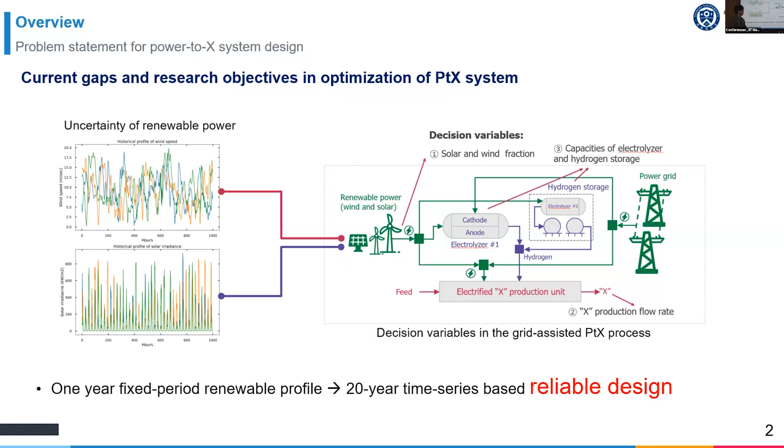So for suggesting some reliable decision point or design point, considering the time series uncertainty of the renewable profiles is important to prevent the oversized problems and secure the economic feasibilities.

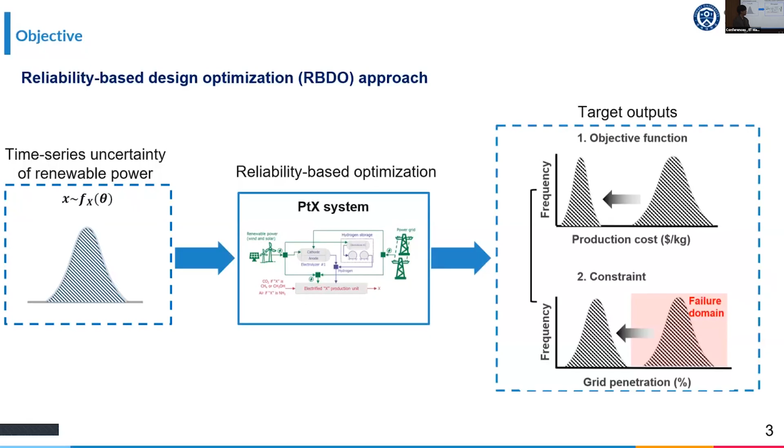So in these studies, we adopt the reliability-based design optimization approach, which is called RBDO. The optimization goal of these studies is to figure out the optimal design variables, which can reduce the impacts of the renewable uncertainty on our objective function, which is the production cost, while regulating the constraints of the renewable performance of the PTX systems, which should be defined in the probability density domain.

So for implementation of the RBDO of the PTX designs, two sections are considered as the workflows. In the first, regarding the construction of the PTX evaluation models, the model calculates the distribution of the production cost and the grid penetrations under the impacts of the renewable profile uncertainty.

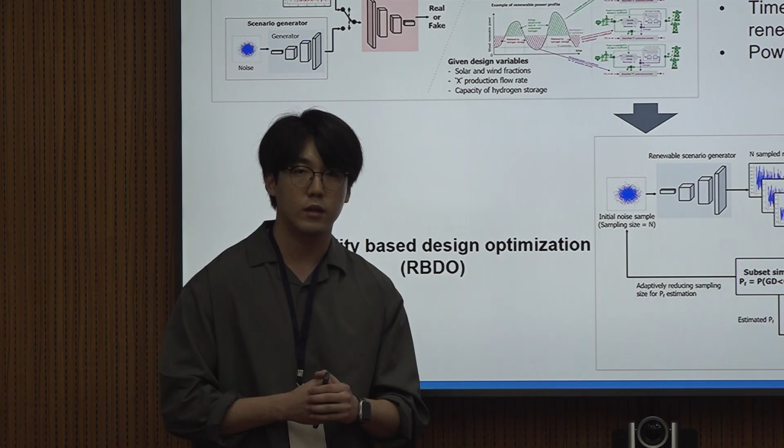To complete the first work, firstly, the uncertainty modeling of the renewable profiles was conducted based on a data-driven approach. And second, under the given renewable profiles and the design variables, a power allocation model was formulated to calculate our target outputs. And in the second section, in RBDO, the constructed PTX evaluation models were properly integrated with additional stochastic simulators and conventional derivative-free optimizers to figure out some reliable design points.

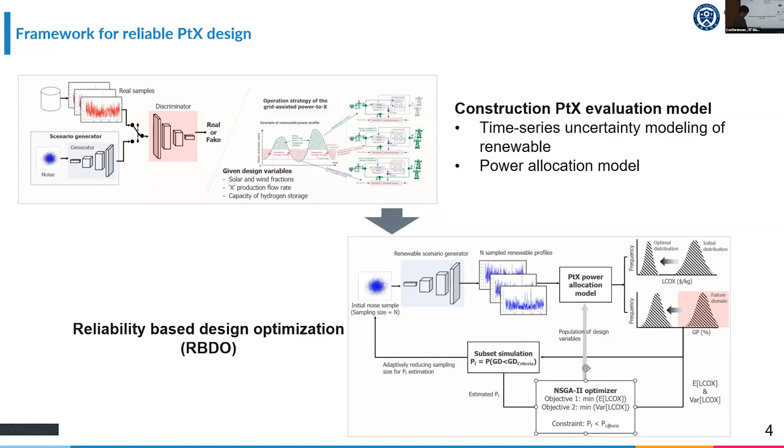So in the first section, for constructing the PTX evaluation models, we adopt the generative adversarial network approach, which is called GAN, to model the uncertainty of the renewable profiles. So during the training, the noise sample from the Gaussian is transferred to the generative network, and the network produces fake annual profiles of the wind and solar. At the same time, in the discriminator network, the real wind and solar profiles are drawn from the database and transferred to the discriminator with the fake generated data.

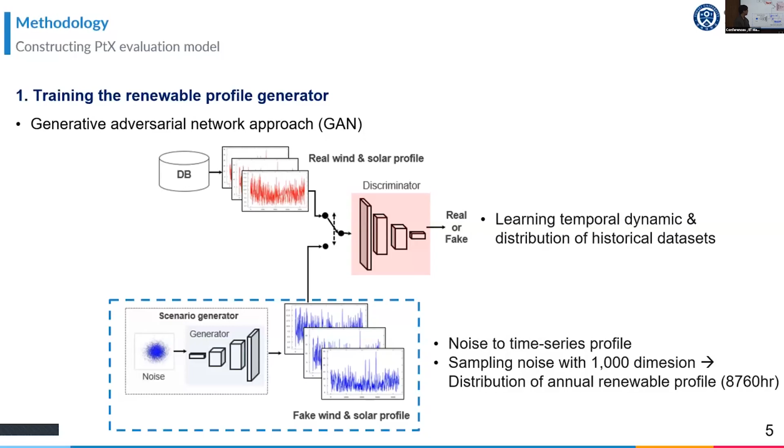So using these two data in the discriminator, the network tries to measure the difference of the distribution between the real and the fake. So after the training, the generator can theoretically capture the temporal dynamics and some complex patterns of the historical data. And using the trained generator, we can generate the distribution of the renewable profiles from simple Gaussian noise vectors.

For training the GAN, Jeju Island in Korea was chosen as the geographical site, and we downloaded data from 2001 to 2019, and the data types are the wind and the solar irradiation. And all of the data was automatically downloaded from the NASA Renewable Power Data Bank API. The detailed network structure and the loss functions are as follows.

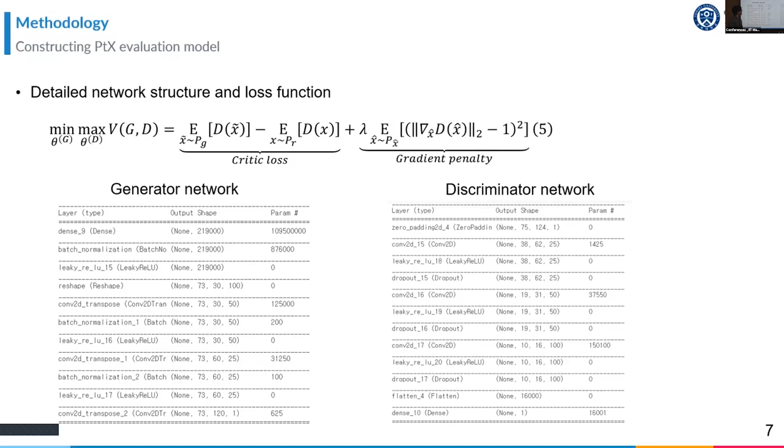In the training, to capture the temporal dynamics of the historical data, deconvolutional layers and convolutional layers are included in the generator and the discriminator network respectively. For the training, we adopt the Adam optimizer and a training batch of the real historical data is transferred to the discriminator network in every iteration, and a total of 1,000 epochs is conducted.

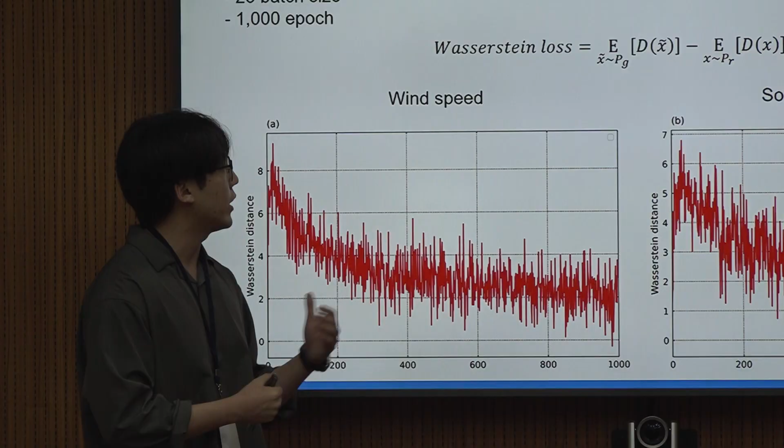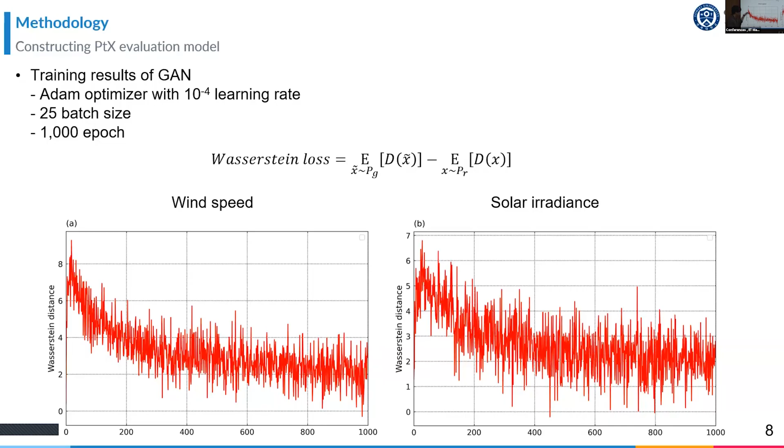As I mentioned, in terms of the generator, it is important to generate fake data which has a very close distribution to the real one. And in the GAN, to measure this performance, we can use the Wasserstein loss, which is calculated by these equations. And this equation means how close the fake data is to the real ones. And as you can see in the training graph, both in the wind and solar case, as the epochs go on, this distance between the fake and the real decreases and goes to near zero.

And the second step for constructing the PTX evaluation model is formulating the power allocation models. Under the given profiles and design variables, the model determines the time series profile of the renewable and grid allocations to the subsystems in the PTX systems. The power allocation can be classified into three major cases.

In the first case, the generated renewable power is transferred to the electrolyzers, and the electrolyzers produce the hydrogen, and also a portion of the renewable power is transferred to the X production systems. For example, we capture CO2 and produce methanol or some high-value chemical. In these cases, surplus renewable power is transferred to the storage tank and converted into compressed hydrogen gas.

And the second case is that if the renewable power is insufficient for operating the electrolyzers, additional power is supplied from the power grid, and additional hydrogen is fed from the storage tank for the constant X production. And the last case is when the renewable profile is insufficient for operating the X production system.

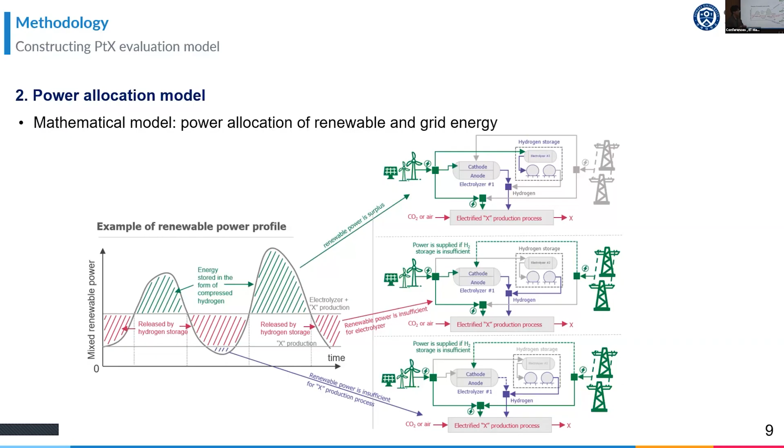So due to these well-defined cases of the power allocation, even though I said these are mathematical models, the power allocation models can be constructed by using simple energy balance, mass balance, and energy conversion efficiency, which is derived from Aspen Plus. And these are examples of how we defined and constructed the power allocation models in the Python environment.

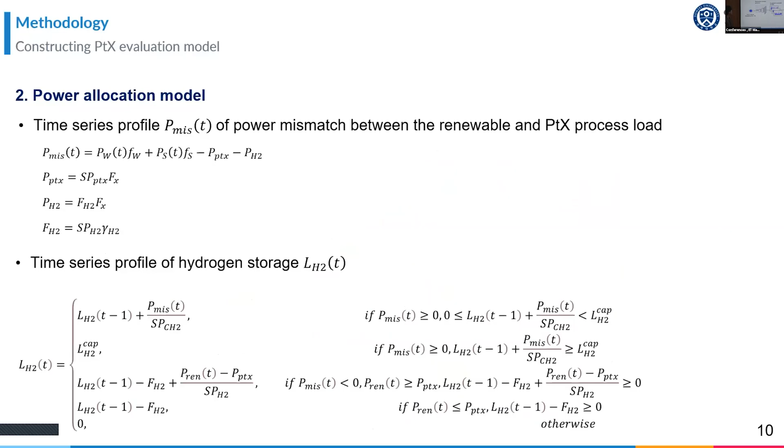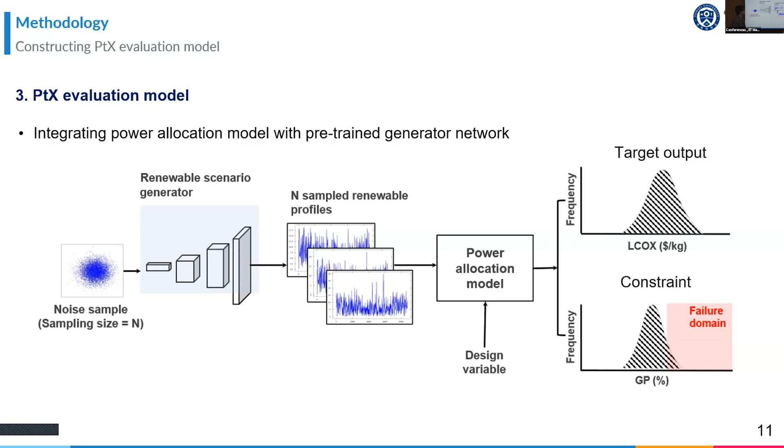According to these procedures, we can calculate the distribution of the production cost and the grid penetration under the given design variables with just simple noise points. As mentioned before, using the PTX evaluation models, we additionally conducted reliability-based design optimization to figure out some reliable design points.

But in the RBDO approach, due to the probabilistic behavior of the system, two different points are encountered compared with conventional optimization problems. The first one is the constraint. In the RBDO approach, for calculating the constraint, firstly we have to define the limits of the constraint. In this case, we assume the grid penetration as a constraint, so we set the upper limit here. And as I repeated, due to the uncertainty impacts, the grid penetration of the PTX also follows a probabilistic distribution.

So grid penetration points beyond our upper limit can be defined as failure points of the system. This is just a semantic definition of failure, and it does not mean that the process really fails. So just remember it. According to these definitions, if we know exact information about the distribution of the grid penetration, we can calculate the probability of failure of the system.

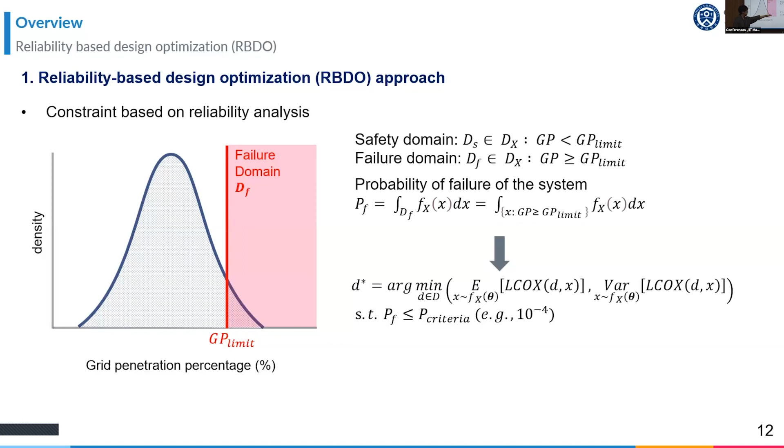But calculating the constraint, which is the probability of failure, needs additional stochastic simulation techniques. Of course, if our model is simple, linear, and low computational cost, we can just use simple Monte Carlo simulation to calculate this failure probability. But our PTX evaluation model has a high dimension of uncertainty, and the PTX model itself has high nonlinearity. So the Monte Carlo simulation approach is not a feasible option. So in this study, we adopt the subset simulation stochastic method.

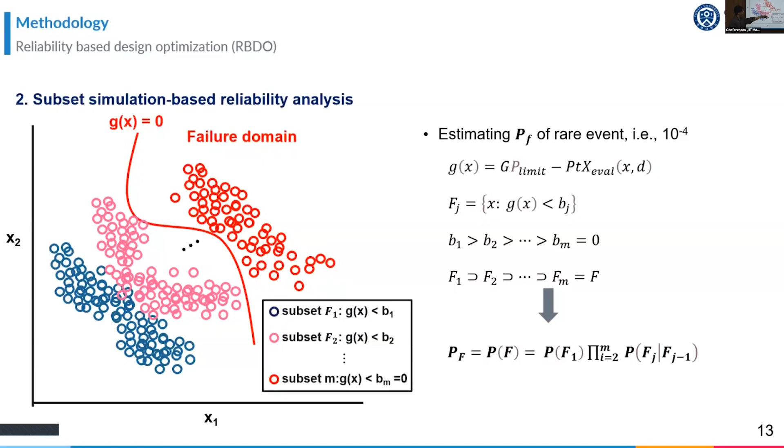The basic idea of subset simulation is to define our target failure as the product of a sequence of conditional probabilities, which can be derived from the subset points. So here, let's say that our target failure domain is here, where the threshold is zero. From the initial subset, using random sampling, we can generate the next subset which satisfies these conditions. And according to the subset simulation algorithm, we can continuously decrease the threshold and calculate the failure probability with high accuracy.

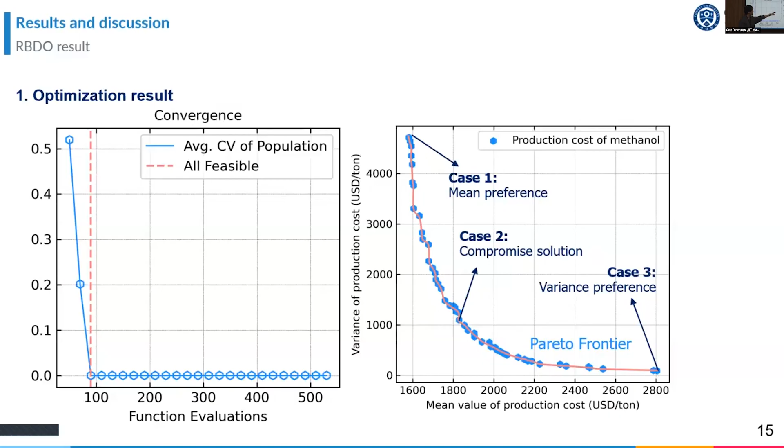So according to these two techniques, we formulate the framework. As you can see in the graph, all the optimal points satisfy our constraint. And because we adopted two objective functions, the production cost has a trade-off relationship between the average value and the variation. And this is the uncertainty propagation result for these three representative points. As you can see in the graph, the variations generally continuously decrease.

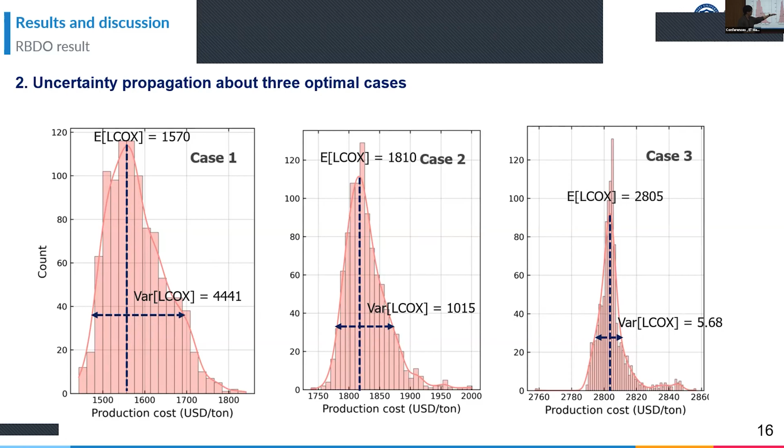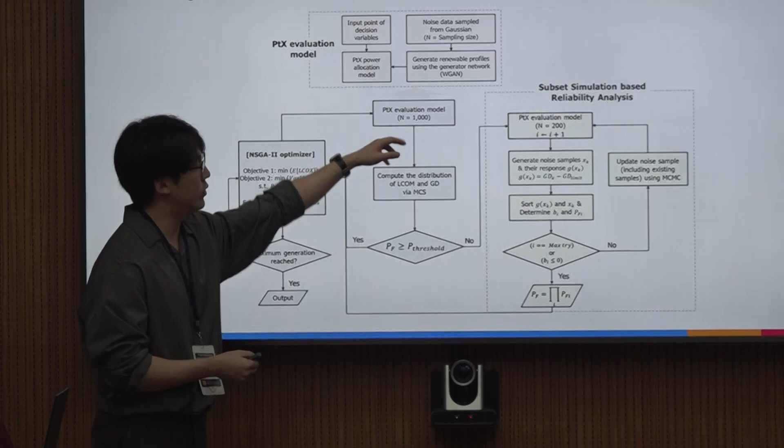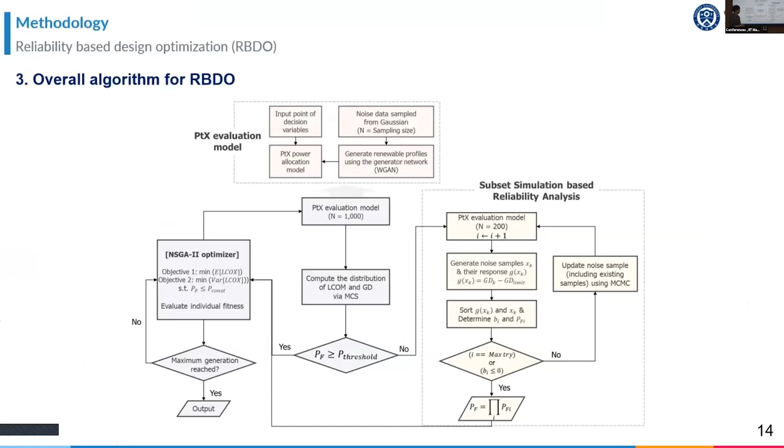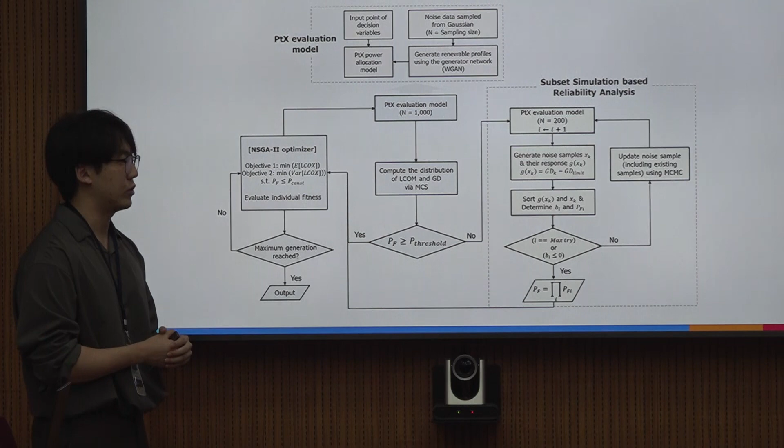Okay, maybe I'll ask a quick question. How many samples do you actually use for this? First, to calculate our objective functions, 1,000 samples are generated from the noise. And as I said before, to calculate the failure probability, more samples are required to meet high accuracy. So in this case, we adaptively sample using the subset simulation method. We did not track how many samples are required at every decision point, but maybe we could add that in a figure to illustrate how effectively it reduced the sampling points. Anyway, it's 1,000 samples.